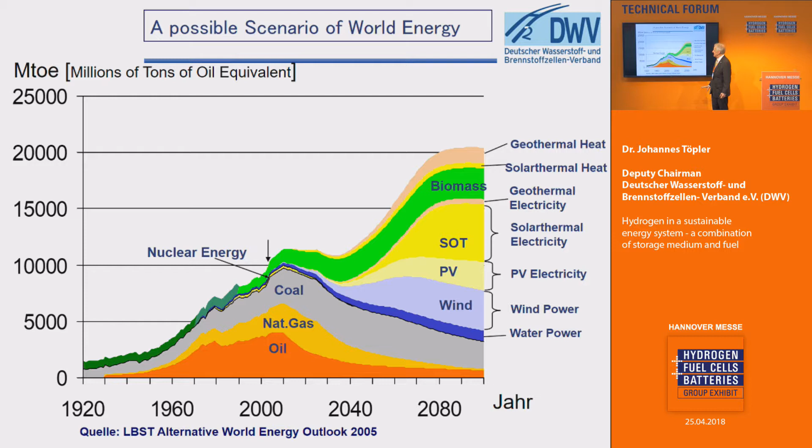And in future we will have more and more wind, photovoltaics, solar thermal energy, biomass, geothermal energy, and so on. And the most important difference between the conventional energies and the new ones is that in the past the energy was concentrated in matter, in oil, coal, gas, and from this fuel-based energy system we had to produce electricity.

In future we will have, for example, wind power, photovoltaics, solar thermal energy, and from this the first step to energy which can be used for technical purposes is electricity. That means we will have a strategic transition from a fuel-based energy system to an electricity-based energy system. That's a very important strategic step, and now we have to look how the electric energy from these sources will be available.

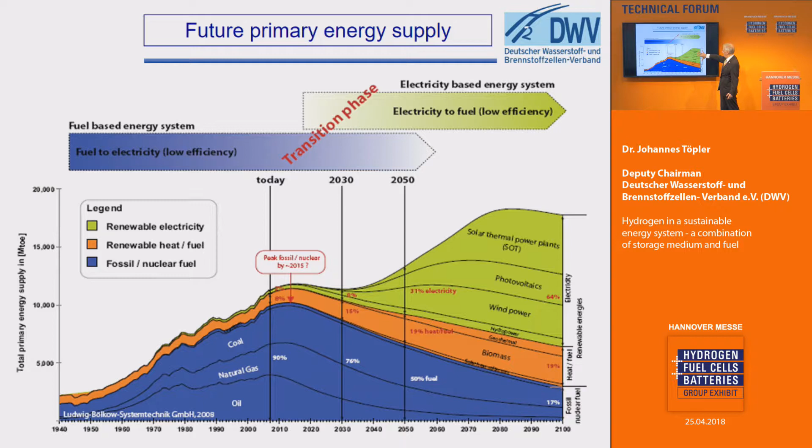And here you find an example for the power distribution in the E.ON grid in 10 days in March 2007, and you see here the power distribution in the electrical grid from wind energy. In Germany we have the legislative situation that this power should be multiplied by a factor of 3 till 2020, and we have reached this power distribution right now a little bit earlier, and you see here the distribution in these 10 days with actual power exploitation.

And the vertical load in the network was the brown line, this one. And you see here that in these days the demand could not be satisfied by the supply by far. There is a factor of more than 5. And here are some other days, 2 days, where the supply outreaches the demand by far. And this means that we have to store the additional energy of these days to have it available, for example, in days when we have not enough wind energy.

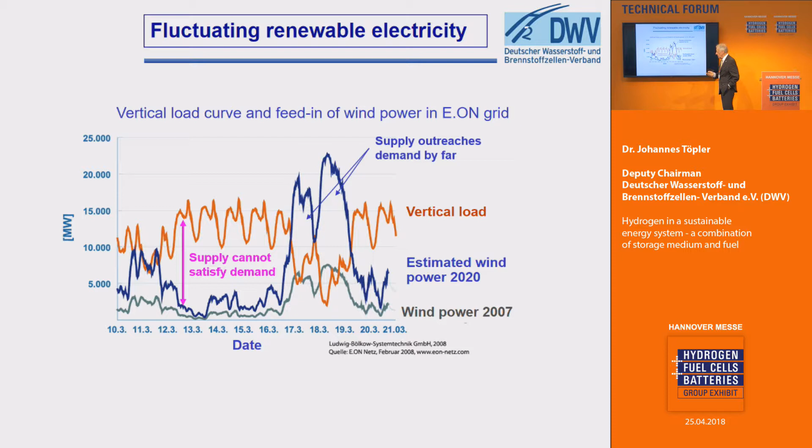For example, if you pay 30 cents for 1 kilowatt hour, then with 1 terawatt hour we are discussing about 300 million euros. And I will show you that this amount of energy can be stored in hydrogen. The first example of a closed cycle energy supply is shown here. We have electricity from wind energy; photovoltaics is also possible. This electricity can be distributed directly, and we can supply it directly to battery-driven electric vehicles.

If we have more electricity available than can be used directly, we can produce hydrogen via electrolysis. How it works, you have seen in the last contribution. And this hydrogen can be delivered directly to fuel stations for electric vehicles driven by hydrogen with fuel cells. And it can be stored in very, very big caverns.

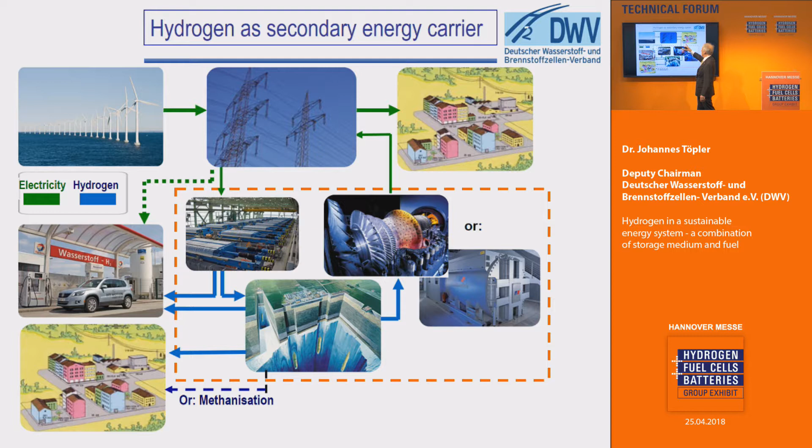And from here, the fuel station can be supplied, or via gas networks, households and industry can be supplied with hydrogen as energy carrier. And this hydrogen can again be re-electrified for the electric grid by fuel cells or even by turbines.

And now, once again, the size of the storage system. We have in Germany some pumped storage systems, and we need them very urgently for the stabilization of the 50 Hertz frequency of the network. And in this case, we have around 1 gigawatt in general and 5 gigawatt hours of energy.

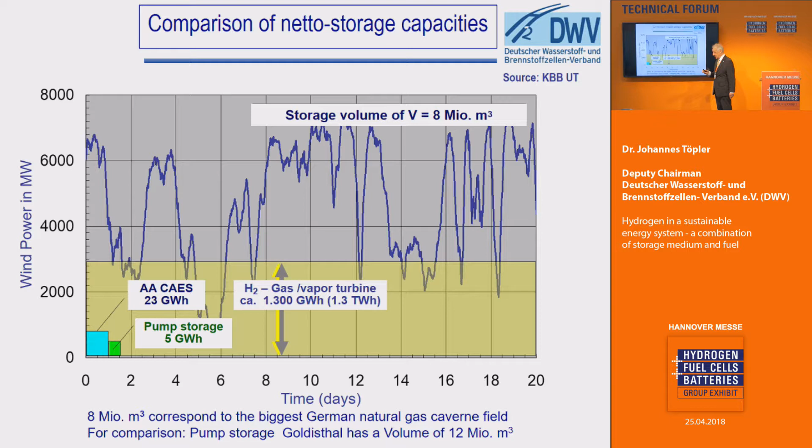We have adiabatic compressed air systems with an energy content of around 23 gigawatt hours and around 2 gigawatts electric power. But for hydrogen, we need around terawatt hours to compensate energy gaps of around 4 days with up to 10 gigawatts. And this storage system, or this amount of stored energy, can only be supplied by hydrogen.

The reason is, in hydrogen we store chemical energy, or the energy of a chemical reaction. We have 280 kilowatt hours per cubic meter in hydrogen compressed with around 120 bars. And this is a net hydrogen storage. And if we subtract the energy loss for electrolysis and fuel cells for re-electrification, we have around 170 kilowatt hours per cubic meter. In comparison, for pumped hydro systems it's 0.7 kilowatt hours per cubic meter, or for adiabatic compressed air systems,

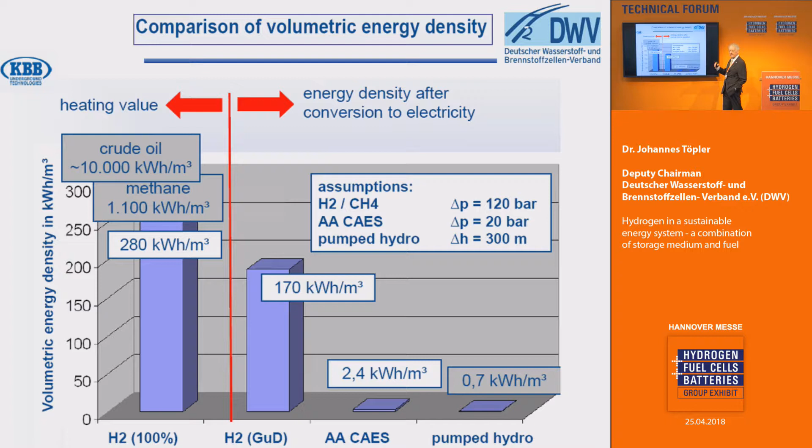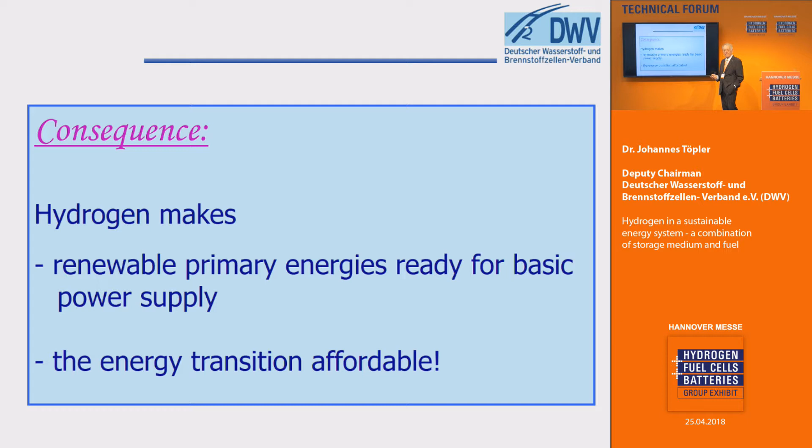2.4. The reason is, here we have potential energy, here we have chemical energy, but this chemical energy must be reversible. And with hydrogen we can do it. We can produce hydrogen with electrolysis, and we can re-electrify it by fuel cells. We have the possibility to store chemical energy reversibly. The consequence is, hydrogen makes renewable primary energy ready for power supply, and it makes the energy transition affordable by the storage capability of big systems.

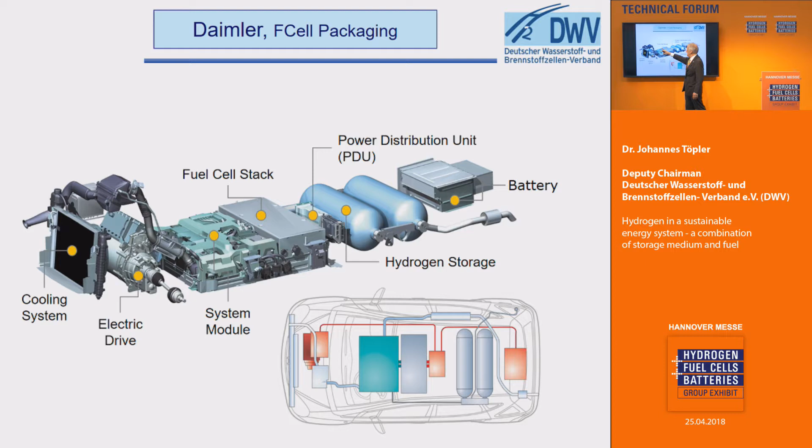On the other hand, we can use fuel cells for mobility, for example in motor cars, buses, trucks and so on. You see several cars, for example from Daimler, at the booth of NOW. The transportation system are the storage tanks with compressed hydrogen. You see some samples today here on the Messe. We have an additional battery. I will tell you the reason a little bit later. We have here the fuel cell stack, the supply system and the electric engine.

And with a car of this type, Daimler B-Class, the most impressive test was done several years ago. It was tested by a trip around the world in 125 days with 30,000 kilometers. It was related to the 125th birthday of Daimler. And the test of these cars has shown that it is possible to construct and to operate these cars under serial conditions. And the absolutely new engine of this system is shown here, and it is built in the Daimler car, the GLC, which is shown here today at this fair.

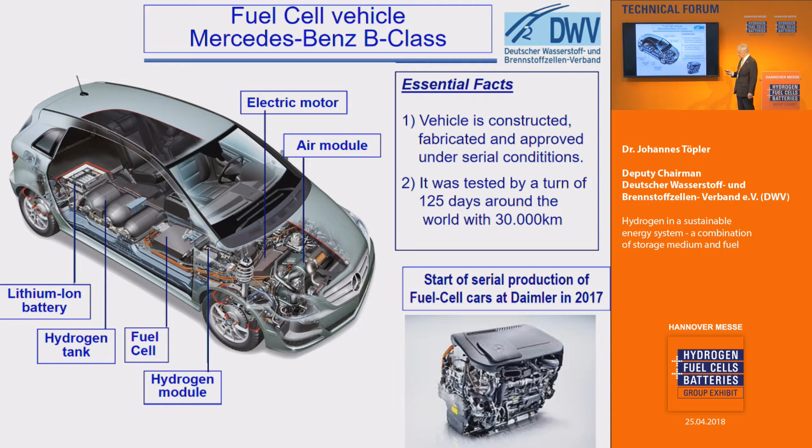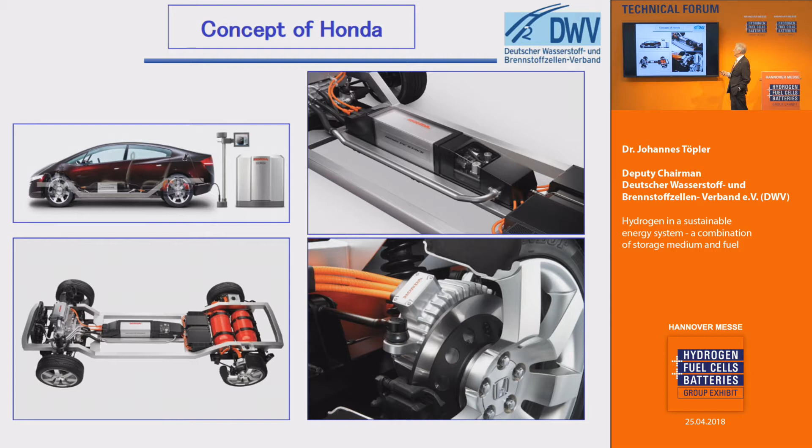Other car manufacturers have other systems. For example, in the case of Honda, it's a four-wheel drive, one drive at the front axle, a wheel hub drive at the rear axle. Even this four-wheel drive system is in operation. And one of the most impressive cars and the first in serial production was a Mirai with a similar packaging. It's similar to the Daimler system, but it was the first one in serial market penetration.

And one comparison to battery-driven cars. Even fuel cell-driven cars have an additional battery. We need the battery for this. I will tell you why. But one comparison, for example, for the range of the cars. In the case of a gasoline car, you see here only the gasoline. Here is a typical chemical formula for this, which is to be transported and stored within the car. Oxygen is withdrawn from air, and carbon dioxide and water vapor as chemical combustion products are released to air as well. In the case of a hydrogen car, we need the hydrogen on board the car as stored energy, and oxygen is withdrawn from the atmosphere, and water vapor is released via the exhaust system.

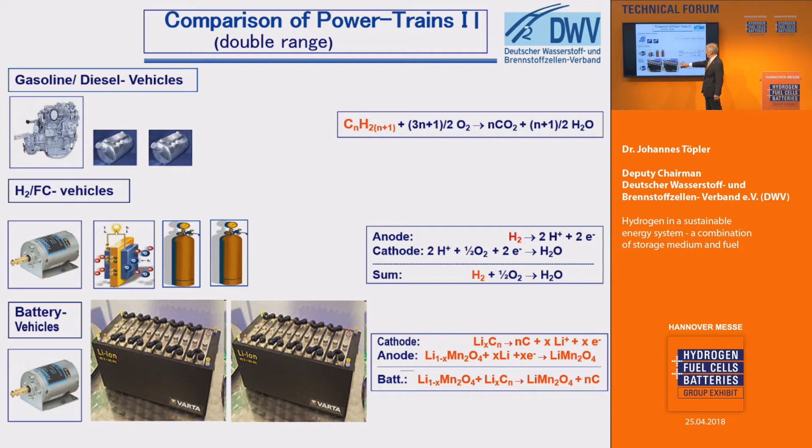In a battery-driven vehicle, for each electron, you have stored on board the anode material and the additional cathode material, for example, with big molecules for each single electron. Here you see the summary formula. And if you want to construct the vehicle for a long distance, for example, a doubled distance, you need a doubled diesel or gasoline tank, you need a doubled hydrogen tank, or you need a doubled battery. That means in the case of a battery-driven car for long distances, you need a lot of battery weight. For example, in the Tesla, more than 600 kilograms.

On the other hand, an additional battery is very suitable for a hydrogen-driven car, because you can make the hydrogen system smaller. For example, for peak loads, and you can use the battery as energy storage for reusing the braking energy. For this case, you have here a generator instead of a motor, and the generated electricity can be stored in the battery.

And the third reason is you have an additional heating system, even for preheating the non-operated car. In the case that you want to start a car in very cold weather, you can start the fuel cell producing electricity, not for driving but for filling the battery. You can get heat for preheating the car, and when you drive, you can drive with electricity from battery and fuel cell in the same way.

You can use, when driving, the waste heat from the fuel cell, and if you reach your goal, the battery should be somehow empty, and you can refill with preheating again for the next start. That means you can heat and preheat your car without loss of range.

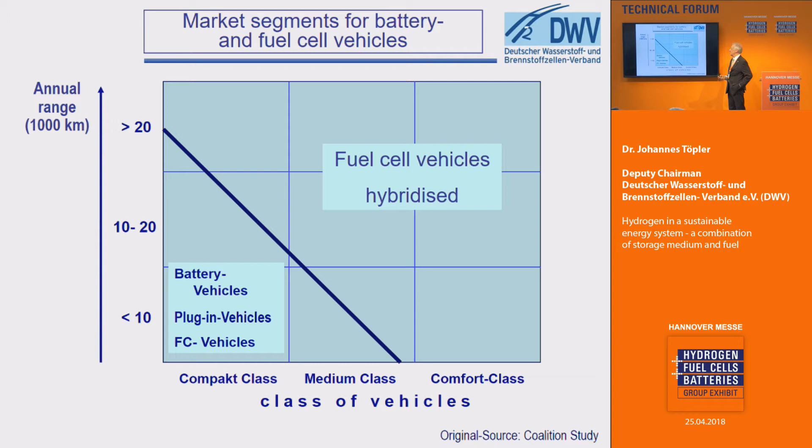In the last years, it was reported that batteries have got a lot of additional advantages. Maybe the result is that this line can be shifted a little bit in this direction, but for these cars and additionally for transporters, for delivery vans and so on, we have a lot of advantages for fuel cell vehicles.

And one other point was discussed in the last years. That was the so-called methanization via the Sabatier process, so that we can make from stored hydrogen synthetic natural gas and use this in cars as well. But we have to look very exactly at what we do.

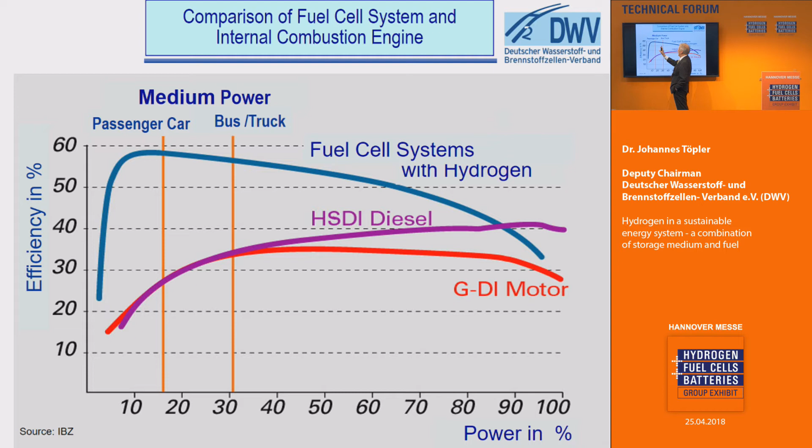If we have, for example, biomass, in this case we have to use combustion engines, and combustion engines have efficiencies like this. That means for high load, the efficiency is similarly high as the efficiency of fuel cells. That's the efficiency of a fuel cell system. And in this case, we see that we have advantages, for example, for biodiesel cars in the range of high load. Normal passenger cars or common buses have advantages in this area. That means generally with fuel cells.

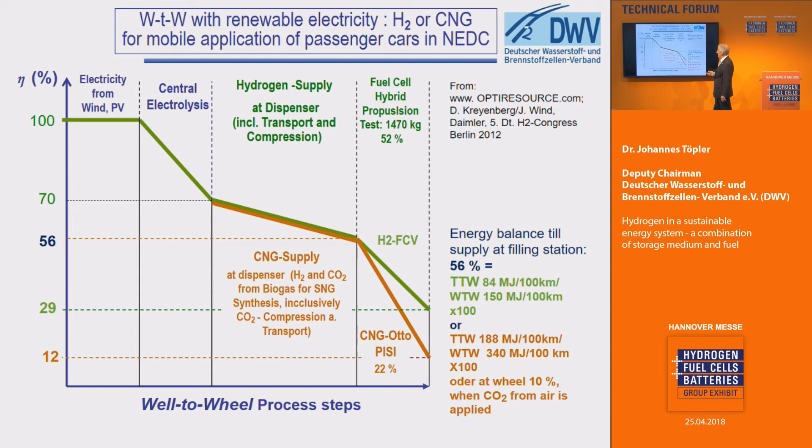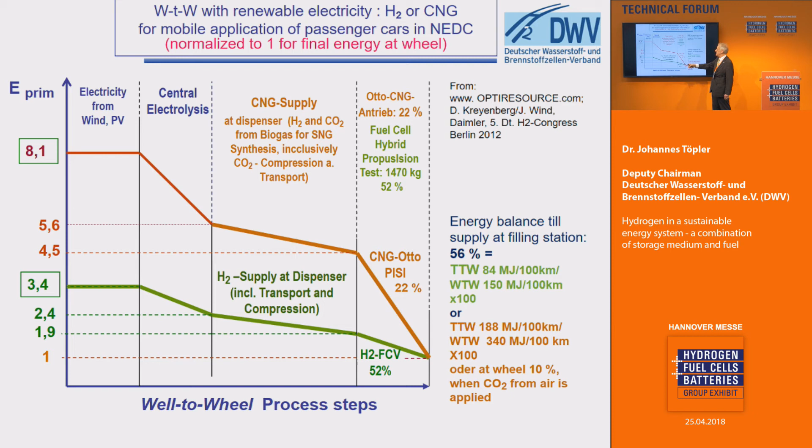And if we look at the energy chain from the opposite side, and we normalize the used energy or the necessary energy at the end at the wheel, and we go back to the necessary energy input, we see that the size of the power plants at the beginning of the whole chain is here around about a factor of 2.5 higher. That means the investment cost for producing the energy or the power equipment is higher as well.

You can look at the different energy chains for yourself in the OptiResource program from Daimler. Look on the internet for Daimler and OptiResource. You can look at the efficiencies and the carbon dioxide emissions directly for all steps, and you will find the emissions by energy and the emissions for carbon dioxide as well.